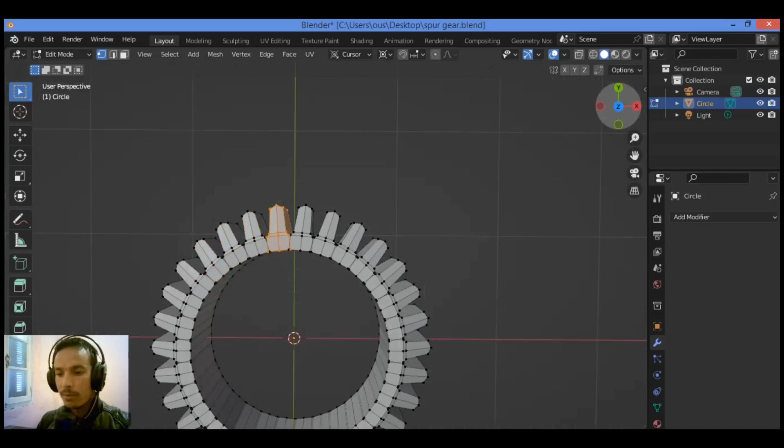And we have created this amazing gear as shown here. So let me explain some interesting things we should do.

Let's continue merging some vertices as shown here. Then I want to fill some gaps. Click on this vertex, M to merge at center. Shift R, to merge at center.

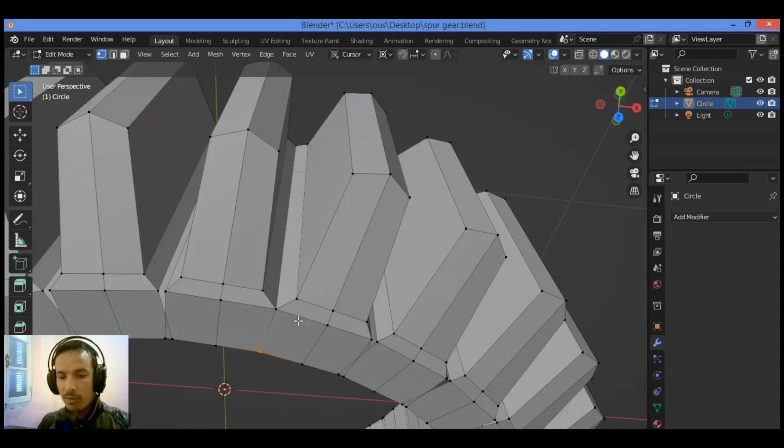Should merge all those vertices and fill all those gaps. And we have done with this part. I tried to fix all those gaps and remove those issues.

So we have something weird over here. It doesn't make the realistic shape for our gear, which is the teeth and the corners of teeth are not in straight line, are not compatible in straight line with this edge and this edge.

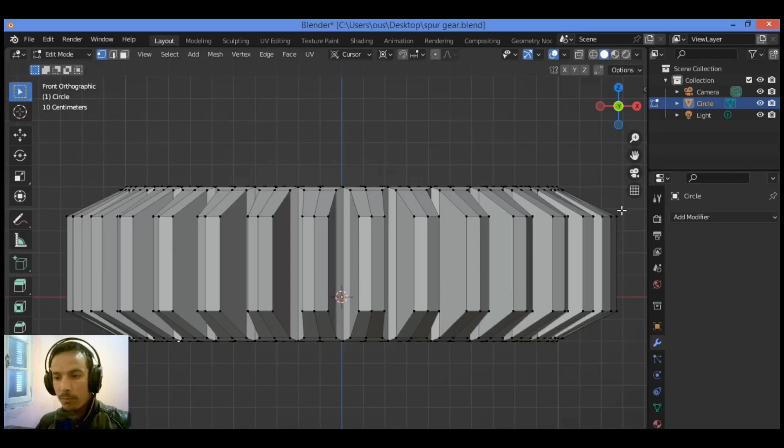Let's select them all, turn on X-ray mode like this, select all those vertices as shown here.

Let's see how we can scale them on just the Z axis. Scale, Shift Z. In order to scale just on the Z axis, hit S and make sure you have set this to bounding box center in order to make it go into the center and scale it on the Z axis, just on Z axis, S then Z. It's gonna be making what we want.

I think it's good and fine. And it's done, it's pretty amazing, I think so. What we should do, I think all those discs are much bigger, so let me make them much smaller.

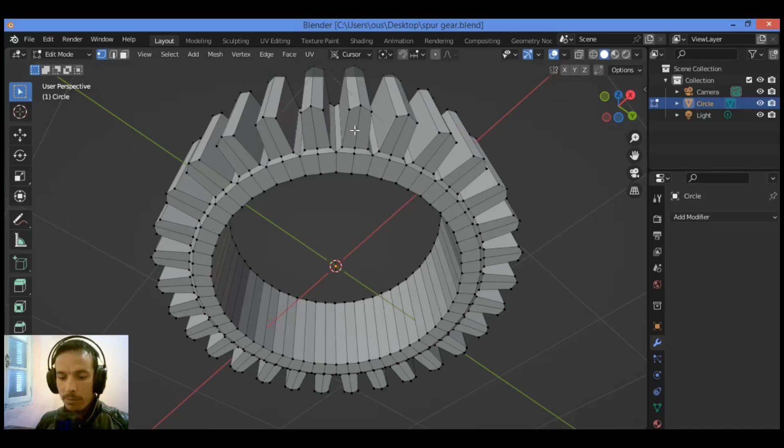Turn on the X-ray mode. I'm gonna be using C to select all those vertices like this, just select the vertices of the teeth corners, just like this. Let's see how to scale them.

In this case, how to scale them inward. I'm gonna be using the cursor as pivot point. So in this case, we should select the 3D cursor, then hit S to scale them, just like this. Turn off the X-ray mode.

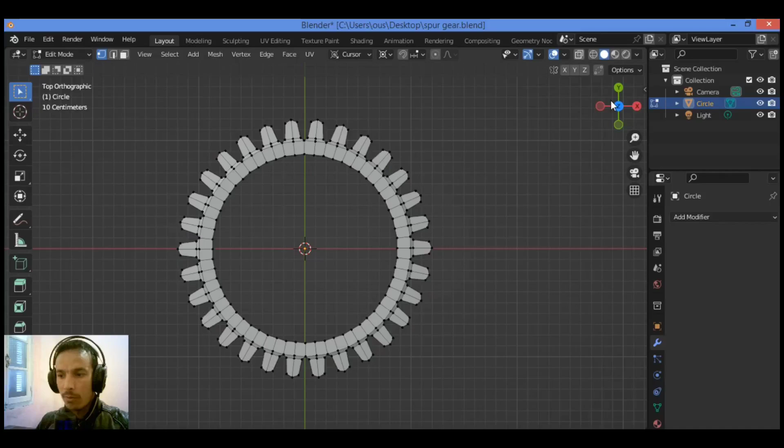I think it's fine and amazing teeth gears. So let's add some supporting loop cuts. Control R. Let's move it closer to this edge.

Like this, add another supporting loop cut, close to this edge over here, Control R, add two loop cuts like this. Control R again to add some supporting loop cuts at the edges of this hole.

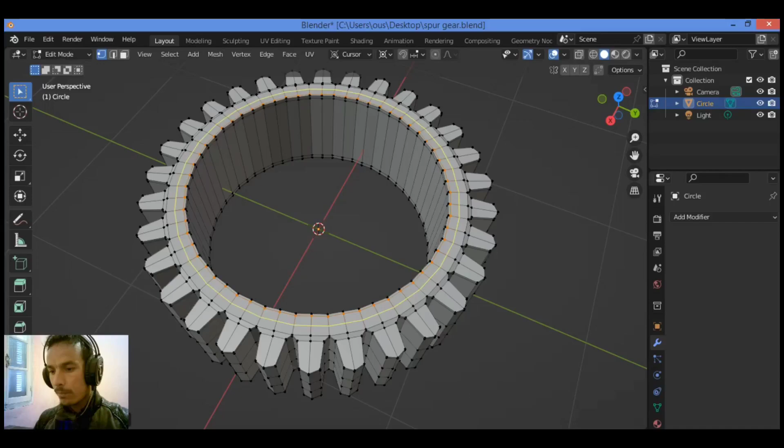Control R again, slide it to the bottom. Control R, just like this. Control R. And then let's see what we have.

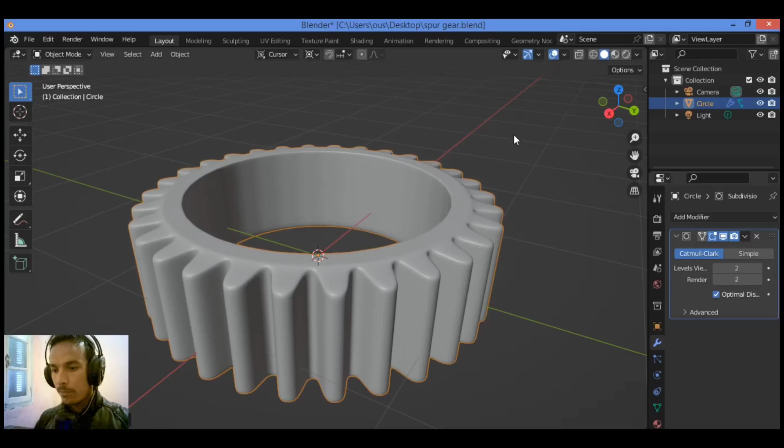Let's add subdivision surface modifier. I think it's pretty amazing. Shade smooth. So let's see what we have. It's amazing here, just we need to add some other loop cuts to support some edges.

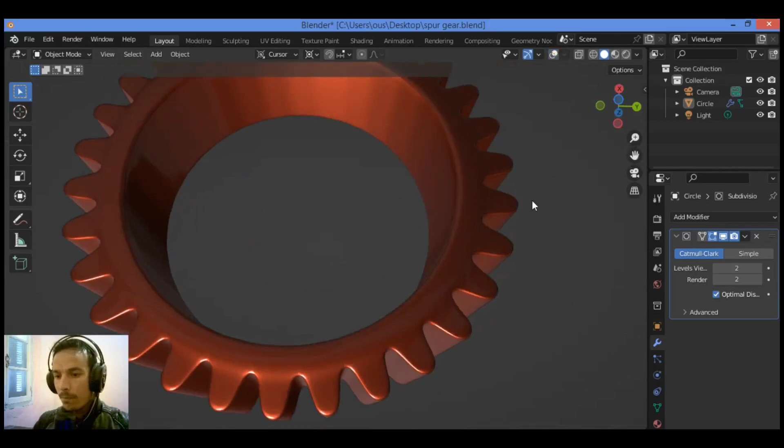Switch to this MatCap, reflective MatCap, to see what we have. It's pretty amazing. Turn off subdivision surface modifier. Hit A, Shift N, recalculate normals, M to merge by distance.

Let's add some supporting loop cuts. Control R. Add in some supporting loop cuts to those edges like this. Control R.

Because this method is so slow, you can use the fastest method. In the next tutorials, I will show you how to use the fastest way to create a gear. Just I want to show you some principles and different methods to make a gear in Blender.

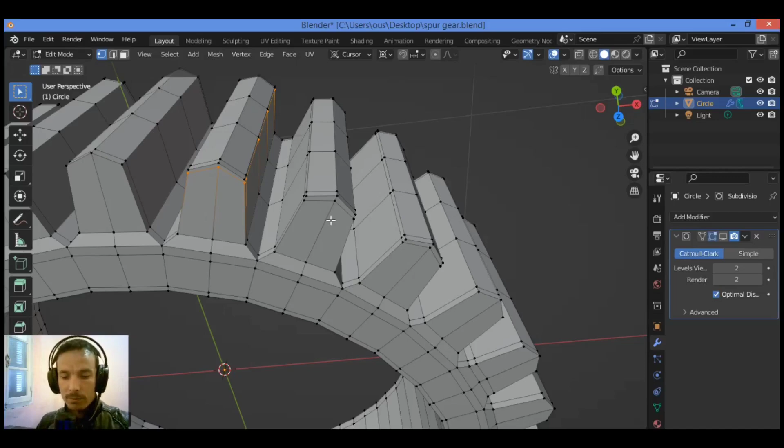And it's done with our amazing gear. Hit A to select all, Shift N, recalculate normals, M to merge by distance, and it's so fine.

Let's add a subdivision surface modifier. Switch to reflective MatCap. Let's see what we have. Shaded smooth. It's pretty amazing gear.